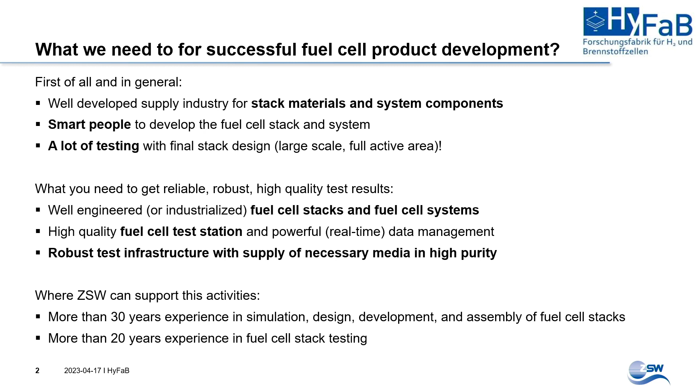Thank you for this intro. I would like to talk about the HyFaB project, which is a very interesting and big project for us at ZSW. And we are happy to support your product development with these activities. So what do you need to have a successful product development? First of all, you need materials, so you need components for your stack and for your system. You need smart people to develop stacks and systems. Better? Okay, thank you. And you need a lot of testing. That means you would like to test fuel cell stacks and systems on a full-scale level, which is very important.

How do we get reliable, robust, high-quality fuel cell testing? You need fuel cell stacks and systems, of course, to test. You need fuel cell test stations and a robust infrastructure. And you need, of course, high-quality reactants like hydrogen and air to get realistic data. We can support those activities with more than 30 years of experience in simulation, design, development of fuel cell stacks and fuel cell stack assembly, and more than 20 years of testing activities.

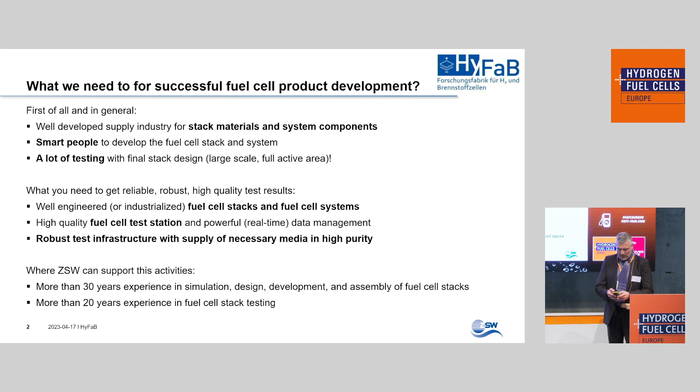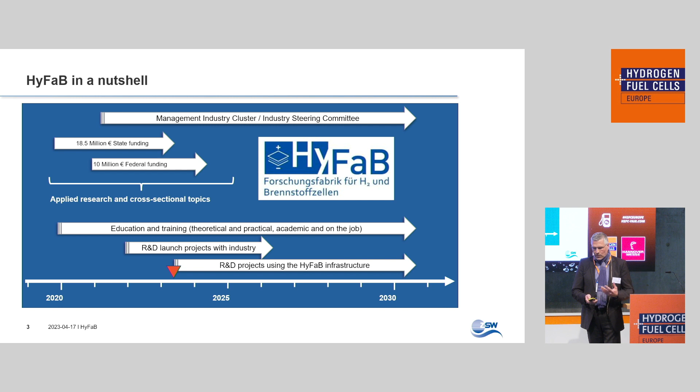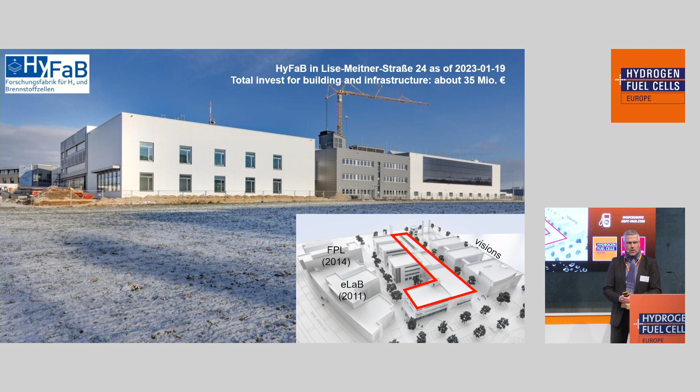This is a picture of the buildings that we were able to set up. On the right-hand side, you can see that this building, HyFaB, is right behind the battery research building called eLaB, which was established in 2011. And right behind the eLaB, we have the so-called research production line for batteries, established in 2014. The red marked area are the two buildings for the HyFaB. Thank you. HyFaB 1 and HyFaB 2. And behind that, you can see on the big picture there's a green yard or a white yard here. The picture is from January this year. There we have free space to fulfill our visions regarding further activities, further buildings for ZSW.

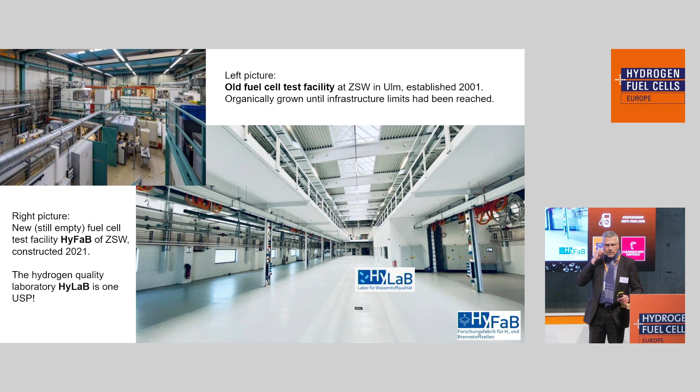On the top left-hand side, you can see the old facilities in Ulm. The test activities were established there in 2001, organically growing until we reached the limits of the infrastructure. You can see that on the photo here. It was really very crowded and there was not much free space for any kind of test stations. Right-hand side, you can see on the big picture the new HyFaB building, HyFaB 1, which was constructed in 2021, and we are currently moving into that building, which allows us to expand the activity significantly by a factor of roughly 5. A unique selling point is that we have a hydrogen quality laboratory in there, which is called HyLaB. As mentioned, we need high-quality reactants, hydrogen and air, and the HyLaB activities allow us to measure online the hydrogen quality to get high-quality data for this kind of fuel cell stack testing.

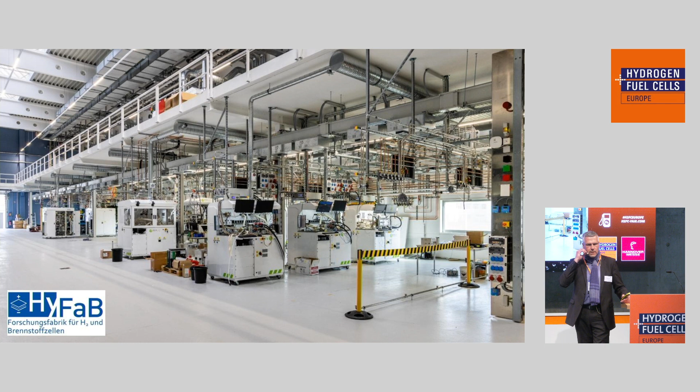This is how the HyFaB Building 1 currently looks. We have roughly 40 fuel cell test stations, starting with a power range of around 1 kilowatt, and going to fuel cell test stations of up to 250 kilowatt to also operate full-size stacks for truck and heavy-duty application.

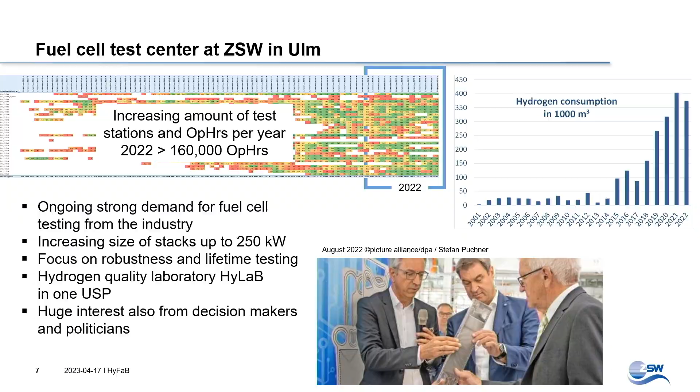Our focus is on robustness and lifetime investigation because that's one of the big issues which needs to be addressed for heavy-duty, where the lifetime is going up to 25,000 operating hours, and for maritime application it's going up to 40,000 operating hours, which is one of the big challenges still for the fuel cell technology. HyLaB is supporting that because we need to ensure the hydrogen quality for this kind of testing activities.

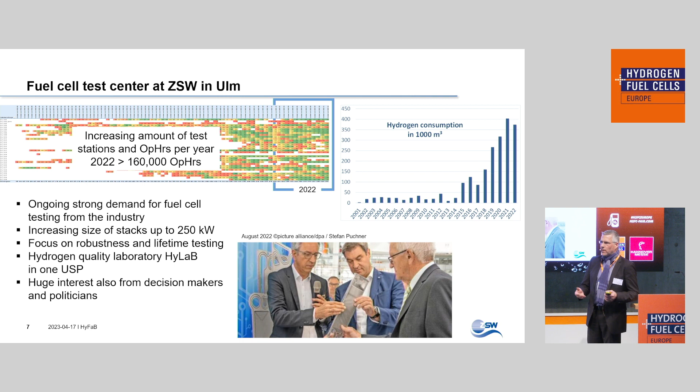And as you can see in the picture in the middle, it's also very important to keep people informed about what's going on there because there's a lot of lack of know-how for these new technologies, and we are supporting that by different activities, getting decision makers in the picture of understanding what's going on there with this new transition process.

Our test station portfolio looks like this here. We have about 4 test stations with 2 kilowatts. As you can see here, 6 test stations with 4 kilowatt, 7 in the 8 kilowatt class, some small test stations, 1 with 100 watts, 2 with 1 kilowatt, 4 with 20 kilowatt, 1 with 60 kilowatt, and 4 new test stations which are going up to 160 kilowatt and even higher to the 250 kilowatt class.

Additional test stations are self-made and some test stations are from other companies. All in all, it's around 40 test stations which we are having in service here, running 24 hours a day, 7 days a week to get reasonable data, especially for lifetime and robustness.

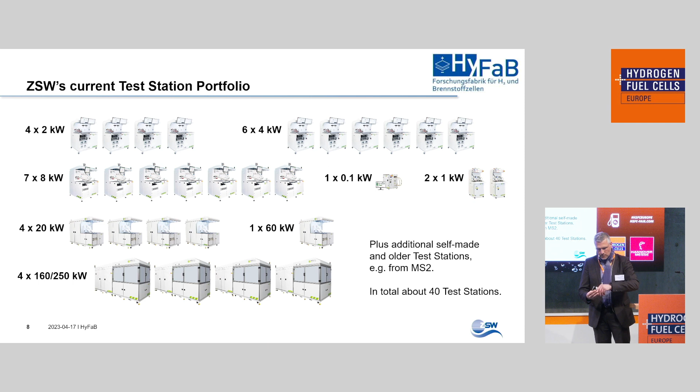Another very important topic within the HyFaB activities is our so-called generic stack. It's an open source stack platform. You can see on the left top here, supported by simulations which were done in-house. We did the design for these metal sheet bipolar plates made out of stainless steel. Active area is 280 square centimeters. You can see the photo here of this plate.

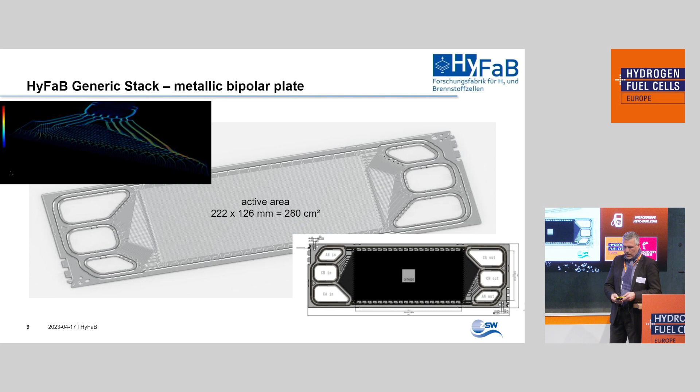And we also are able to assemble that piece of hardware to a full stack, up to roughly 116 kilowatt in electric power. We are going to have around 320 plates in this fuel cell stack. And on the left-hand side, you can see the schematic of the components inside the stack with one plate, end plate, current collector, and the compression system. On the right-hand side, you can see a short stack with the blue and red colored end plates.

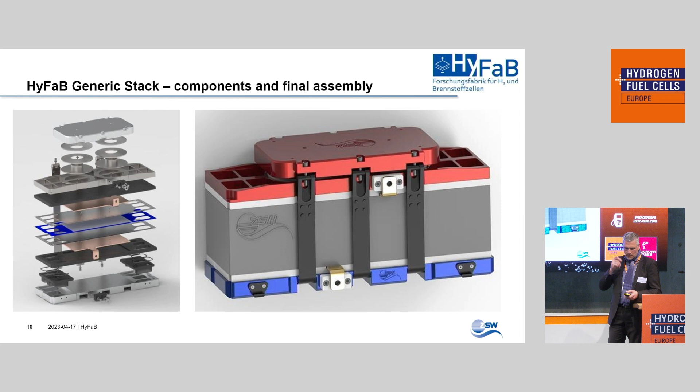Summary, ZSW is able to support your product development on various levels, starting with simulation activities. We are doing the design. We have a lot of know-how there, also in manufacturing and testing. We have very good equipment. We also provide training and know-how transfer for different components, different companies, for students and so on. We have highly motivated, experienced staff.

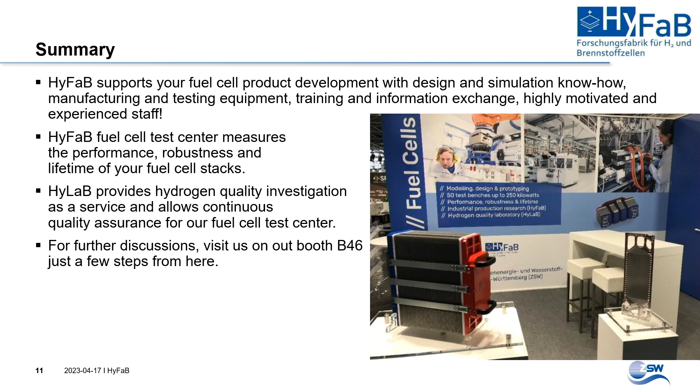HyFaB test center is able to measure the performance and the lifetime, and you are responsible for the performance. We are responsible for the lifetime. I'm pretty sure that we are able to measure the lifetime much better than you can do. We have a lot of experience here, and therefore we would like to show you the maximum lifetime which is achievable for your fuel cell stack.

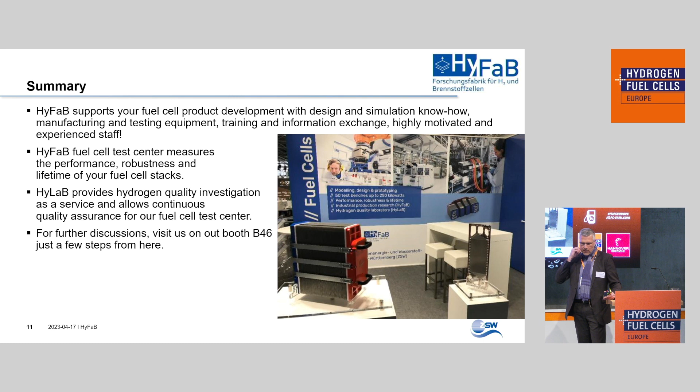HyLab itself provides the hydrogen quality assurance. That means measuring the impurities according to the international documents. We can run this as a service activity. We come to your source of hydrogen, independent if it's a filling station or an electrolyzer. We can take samples there and do the analysis here in our HyLab and within the HyFaB building.

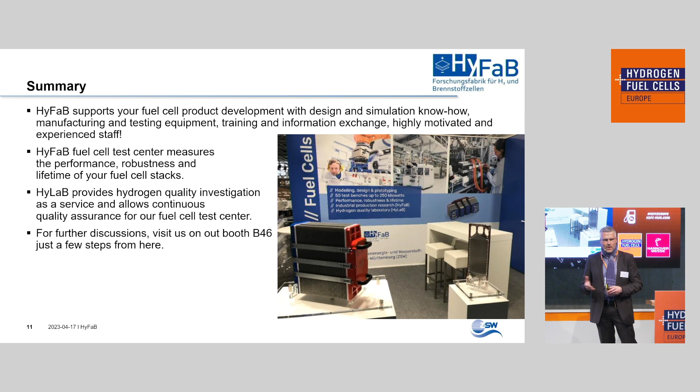If there are further questions, right now any questions are welcome, or you can step just 5 meters behind you to our booth number B46. We will show you there the bipolar plates of the generic stack and also the entire stack assembly with the 115, 116 kilowatt stack. Thank you for your attention. Any questions are welcome.

Thank you, Alexander. So, yes, we do have time for a question. So let me browse the audience. Yes, sir.

Thank you for your talk. Just a question about the simulation. Are you considering to expand your activity, like trying to simulate the fuel cell MEA behavior and not only the bipolar plates? We are starting on a cell level and doing the simulation for the reactants, for the coolant flowing

through the stack, but also we are doing simulation for the entire stack design, so that it's ensured that the reactants are flowing through all those 300 or 400 individual plates here. And also we are going into the simulation of fuel cell systems with an open source simulation tool. So it's the entire supply chain from the component stack over the system into the final application.

Thank you very much. Unfortunately, we only had time for one question, but if you do have more questions, please don't hesitate to approach Mr. Alexander Kabza. Exactly, the booth is right across from here, so it's just a two-second walk. So thank you again. Please give him a big hand of applause. Thank you.